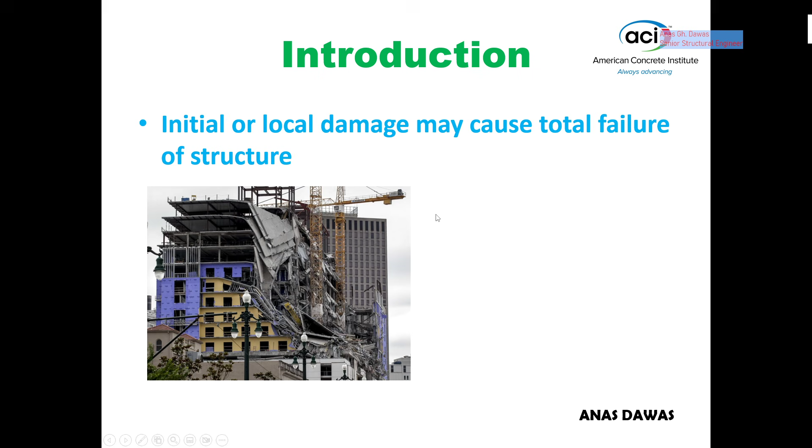First of all, there are many buildings that collapsed totally because of local failure. ACI code is trying to avoid the progressive collapse due to local failure. So if one member fails in your structure, or if one or two members fail in your structure, it shouldn't collapse totally. Initial or local damage in some buildings may cause a total failure of structure. This behavior is prohibited by the code.

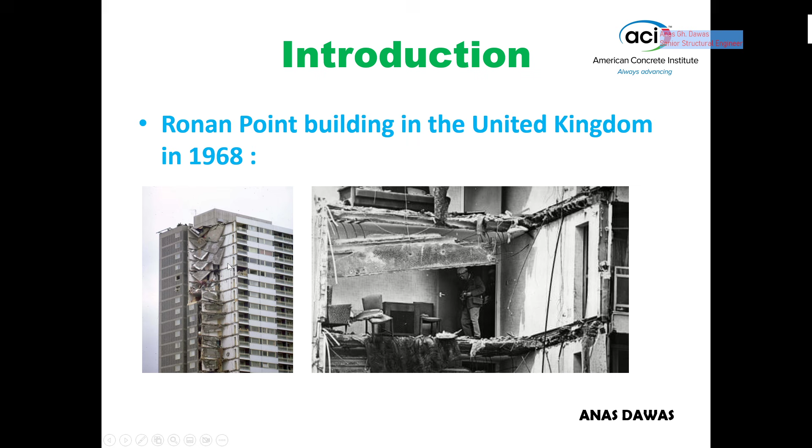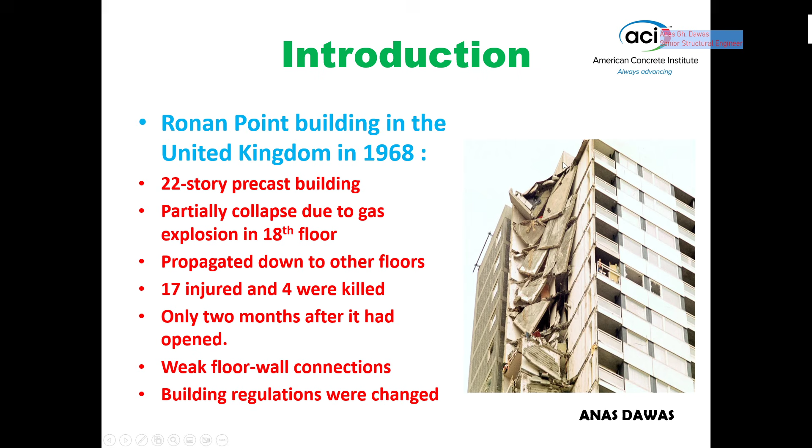This building, Ronan Point building in the United Kingdom, 1968, as you can see here, we can see a progressive collapse due only to a local failure. This building is a 22-story precast building, partially collapsed due to a gas explosion on the 18th floor. This failure or local failure propagated down to other floors. 17 injured and 4 were killed only 2 months after it had opened. The main reason was weak floor-wall connections. Building regulations were changed. So here we have one problem, one local failure caused this type of progressive collapse.

Also in Oklahoma City, 1995, explosion of a truck bomb. As you can see, this explosion destroyed an exterior column supporting a transfer girder, causing collapse of nearly half the RC frame building. 168 deaths. This is a very big disaster.

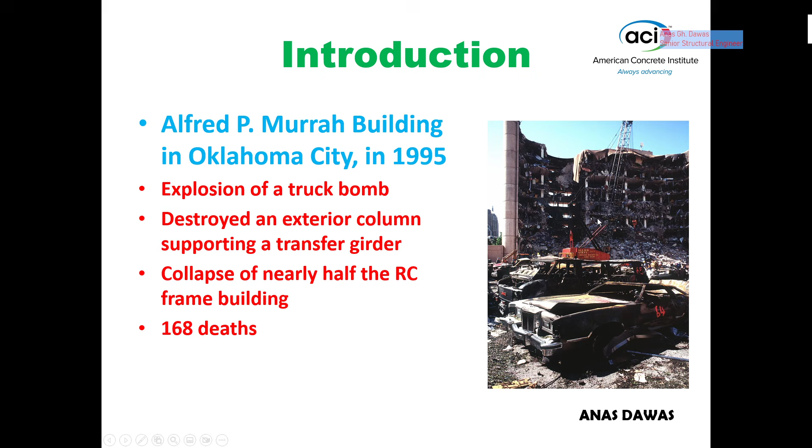Also in Boston, 1971, we have a 16 floor concrete building, punching failure at roof level. Here we have a local failure. Collapse after placing block in all floors, propagated all the way to the ground floor. This collapse caused a damage of 2/3 of the building. For this type of failure we have 4 deaths, and this type of failure is caused by unbalanced moments transferred between the column and the flat plate.

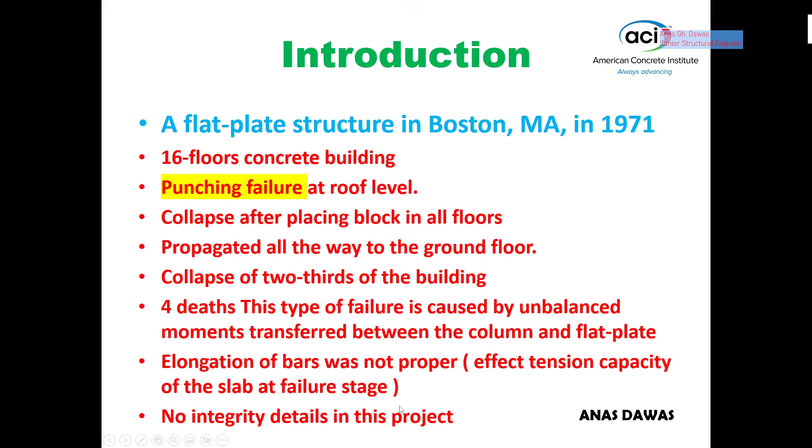Elongation of bars was not proper, affecting the tension capacity of the slab at failure stage. Also, there were no integrity details in this project. As you can see, this portion of the building collapsed totally.

Current integrity provisions are intended to aid in redistributing gravity load after an initial failure. Assume that you have a multi-story building, and in this building, one of the column-slab connections failed due to shear. If you don't provide integrity requirements for this building, the loads of this column will be redistributed to other nearby columns. If the DC ratio to shear is at its design limit, and you don't have margin for the redistribution of such amount of forces, progressive collapse can occur.

In Dubai, for any building with height more than 300 meters, you have to provide a progressive collapse study. This is different than the ACI intent, but ACI is trying to provide integrity provisions. These integrity provisions will not prevent the progressive collapse, but will improve the behavior of the structure, will tie the structure all together to reduce the effect of local failures, and to try to limit the spreading of local failures and to avoid the progressive collapse. But again, satisfying these requirements will not guarantee preventing the progressive collapse, but in general the behavior will be much better.

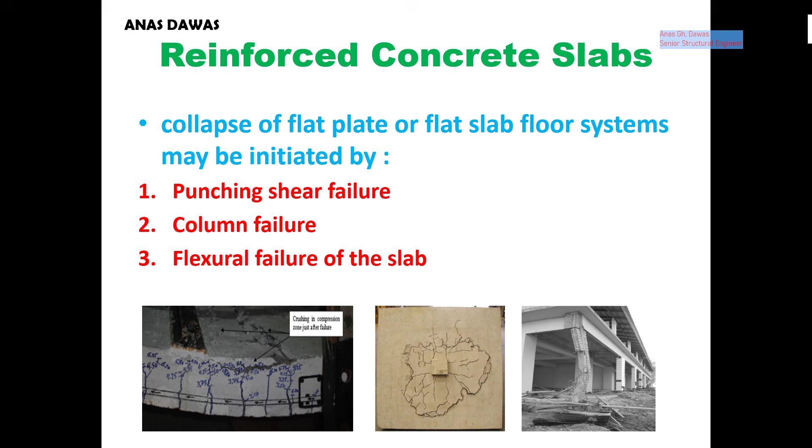Again, here we are interested in gravity loads. I have not seen integrity requirements for seismic forces, but I believe that integrity requirements are very important for all types of loads. But most of the provisions in the code are related to gravity loads. Collapse of flat plate or flat slab floor systems may be initiated by punching shear failure, column failure, or flexural failure of the slab. This local failure can be extended to a progressive collapse.

We have here $216 million in losses. This amount of money is equivalent to 420 million at 2022 value.

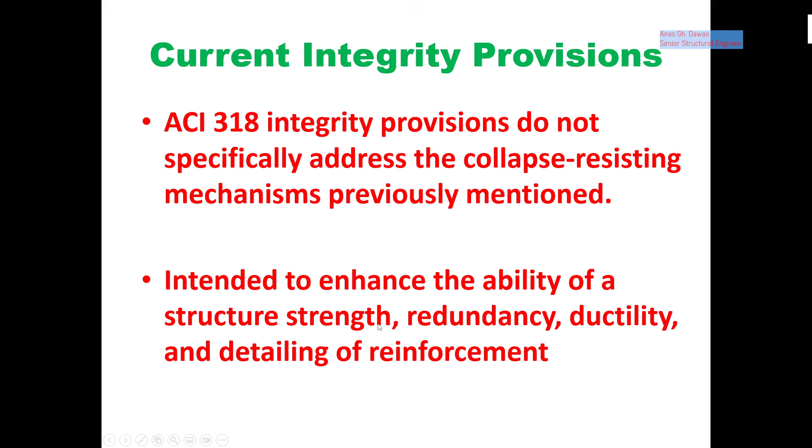ACI 318 integrity provisions do not specifically address the collapse-resisting mechanisms previously mentioned, intended to enhance structure strength, redundancy, ductility, and detailing of reinforcement. Again, it's very important to keep some bottom bars continuous through the column-slab connection to keep post-punching capacity after a failure. This will help avoid transferring the full loads to other nearby connections, and prevent the structure from full collapse.

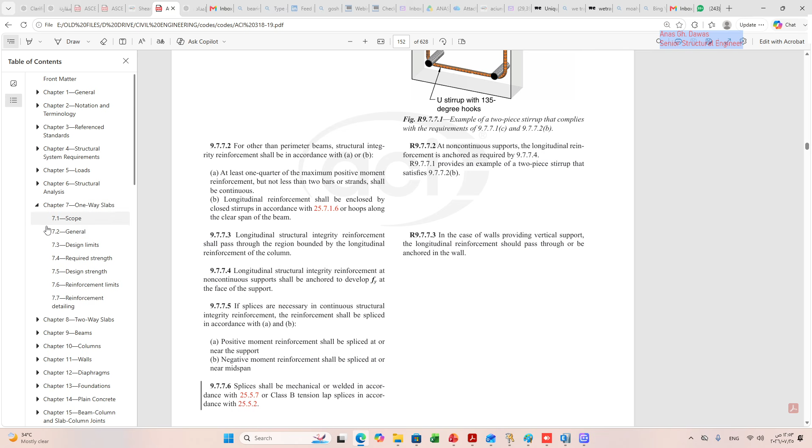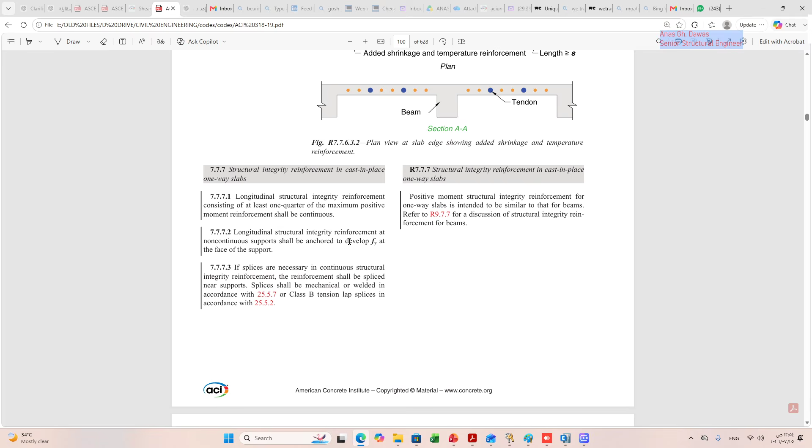For one-way slabs, here we have 7.7 detailing requirements. If you look here, we find something called integrity requirements - structural integrity requirements in cast-in-place one-way slabs. Since this section is included in the main chapter of one-way slab, satisfying these provisions is mandatory.

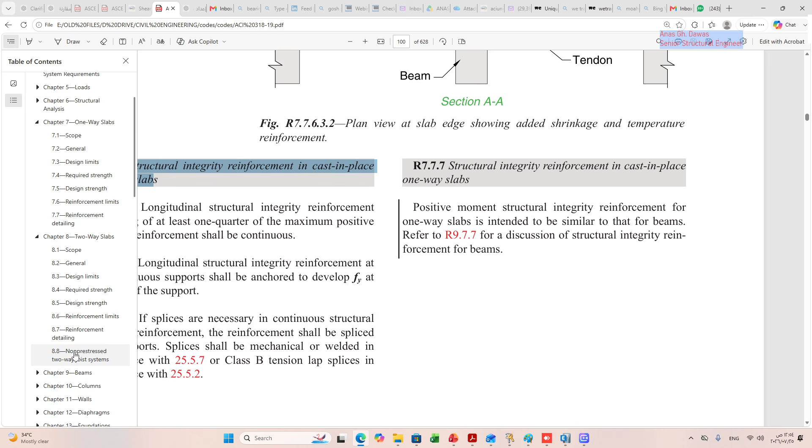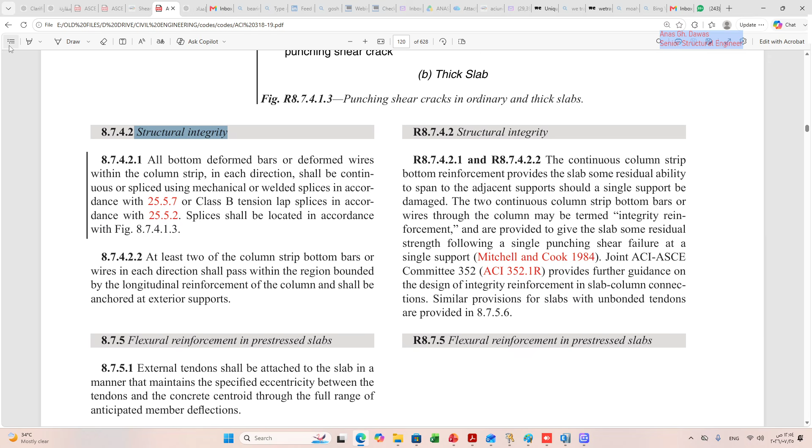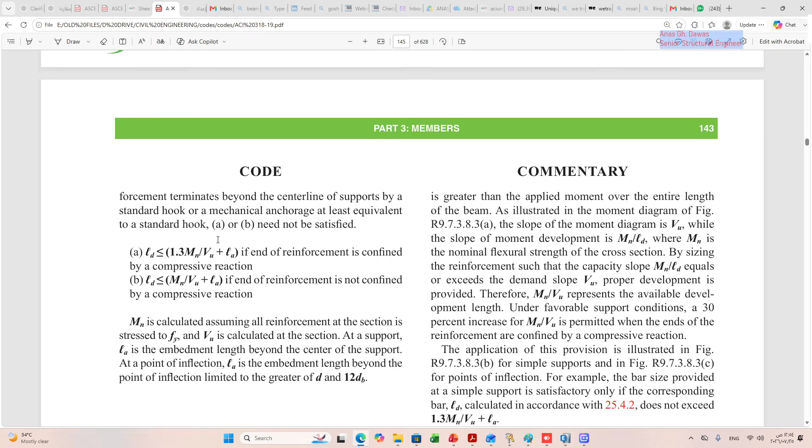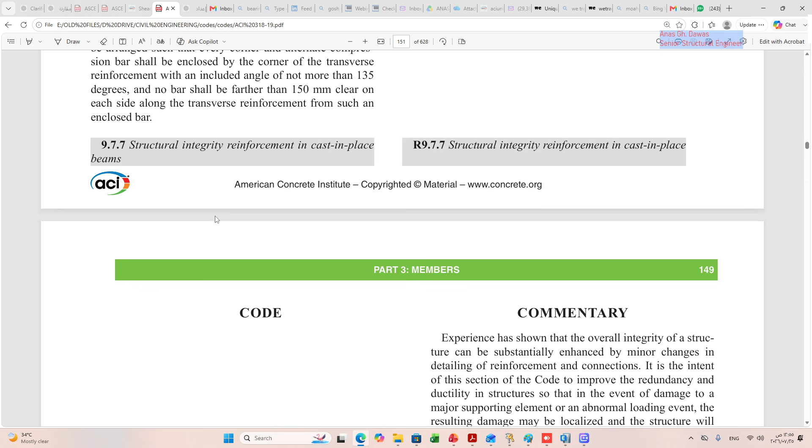Also, if you go to two-way slabs, 8.7 for their detailing, we also find integrity requirements - structural integrity. Also, if you go to the beams chapter, 9.7 for the detailing, we also have integrity requirements somewhere here - structural integrity reinforcement in cast-in-place beams. So they are mandatory. You must satisfy these requirements.

Let's start with one-way slabs. Provision 7.7.7, I think this is commentary: positive moment structural integrity reinforcement for one-way slabs is intended to be similar to that for beams. Provision 7.7.7.1: longitudinal structural integrity reinforcement consisting of at least 1/4 of the maximum positive moment reinforcement shall be continuous. All information here is copyright of ACI, the American Concrete Institute. Anyway, if you look here, 1/4 of the total maximum positive moment reinforcement must be continuous. This is very important.

Longitudinal structural integrity reinforcement at non-continuous supports shall be anchored to develop yield at the face of the support. If you look here, you see some bars extended into the support. As per 7.7.7.2, these bars must be anchored inside the supporting member.

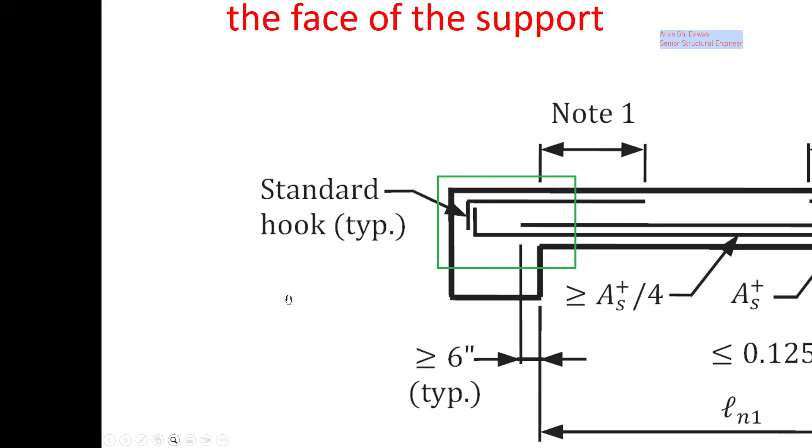Some engineers always think that the development length or standard hook shall be satisfied only for the top reinforcement. But as per the ACI code, especially for the integrity reinforcement portion - not for all bars - the bottom integrity bars also must satisfy the anchorage requirements at the support. This is very important.

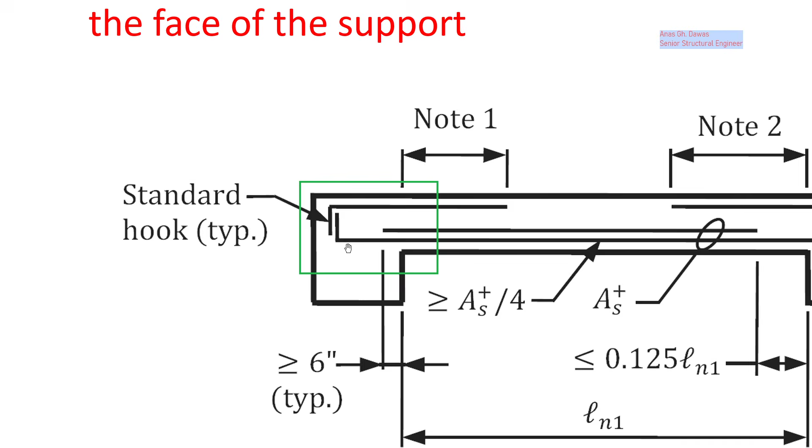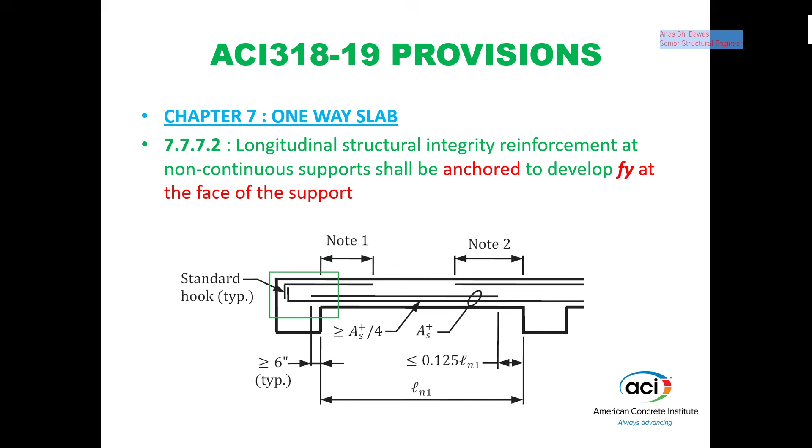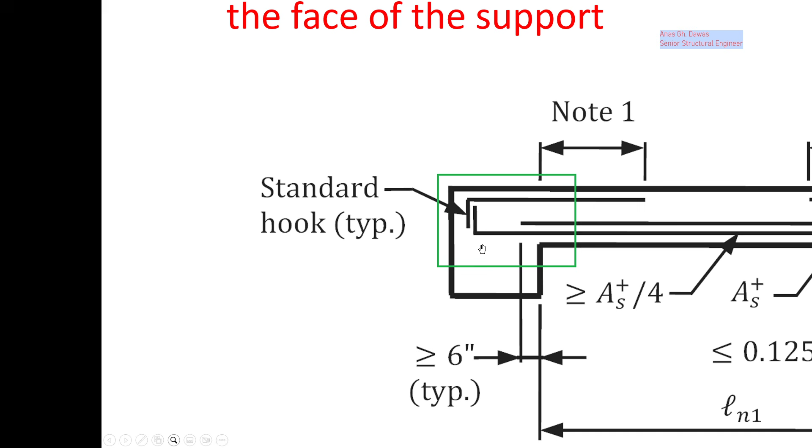By the way, this is for one-way slab. Again, here the development or anchorage requirement cannot be reduced by excess reinforcement or by the reduction of development length for excess reinforcement. Some engineers think that if they are not able to satisfy the anchorage requirements at the support, they can increase more bars to reduce the stress so the development length can be shorter. No, this is not permitted for the integrity reinforcement.

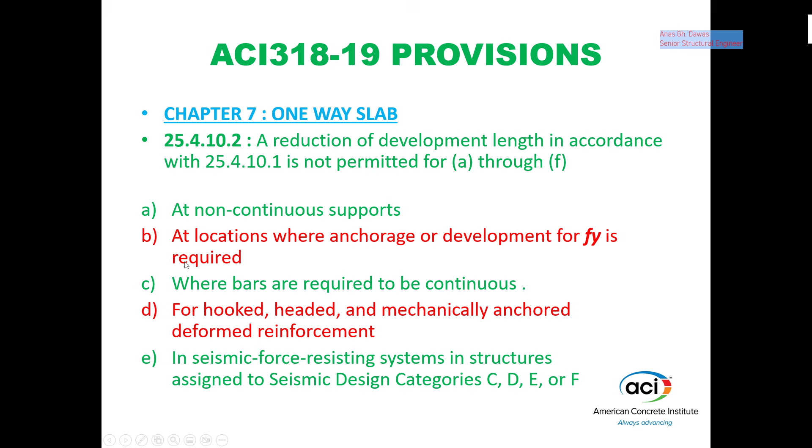We have here around 5 cases where a reduction of development length by using excess reinforcement is not permitted. You have to know that increasing the reinforcement more than required will not allow you to reduce the required development length. One of these cases is at locations where anchorage or development for fy is required, so the integrity reinforcement is covered by this case.

Okay, another provision for one-way slab integrity reinforcement: if splices are necessary in continuous structural integrity reinforcement, the reinforcement shall be spliced near supports. If you cannot keep the bar continuous, you can use a splice, but two conditions must be met: the splice must be near the support, and class B tension lap splices must be used. Maybe you will think that at this location we are far away from the positive moment, so we can use tension splice class A, but for the integrity reinforcement, you must use class B. You will ask me why?

Because the bottom reinforcement is very important to prevent progressive collapse by something called catenary action. By the catenary action, when excessive deformation occurs to the slab, the bottom reinforcement will prevent the total loss of the connections and the total loss of capacity. That's why the code is trying to keep those bars continuous with a class B tension splice.

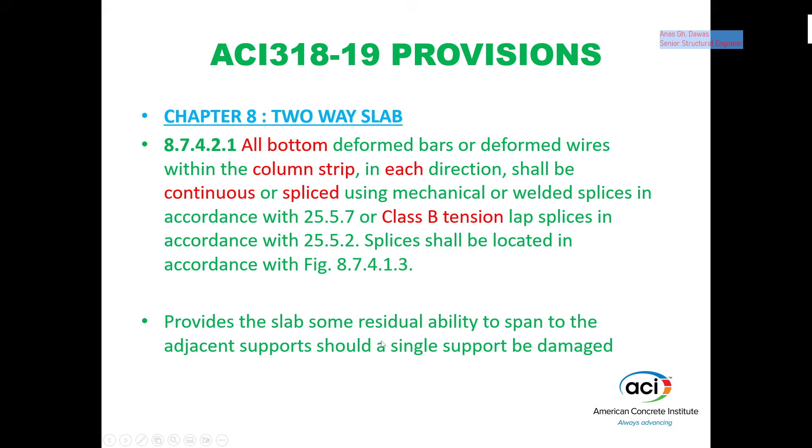By the way, this is not normal or typical in practice. In practice, they are using conventional lap splice, which provides the slab some residual ability to span to the adjacent supports should a single support be damaged.

As you can see here, what does the code need for two-way slabs to satisfy the integrity requirement? First of all, the bars within the column strip width must be continuous, or class B lap splices in tension must be satisfied. Number two, minimum two bars must pass through the core of the columns and must be bounded by the longitudinal bars of the columns. These bars will prevent the total collapse of the slab, will tie the slab, and will prevent the total loss of the connections, and will provide post-punching capacity.

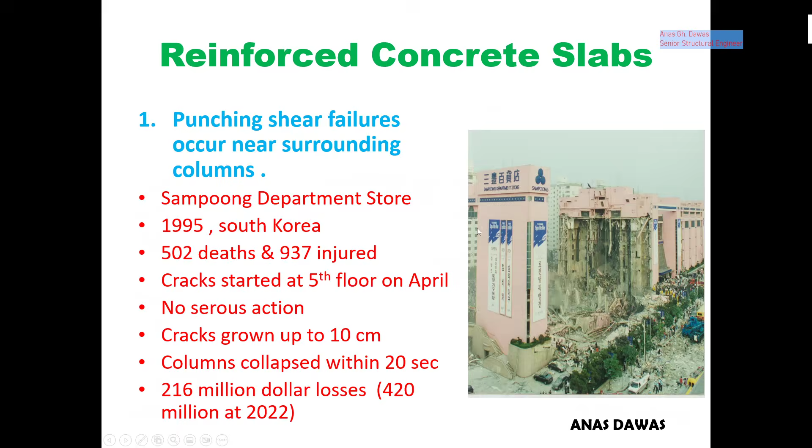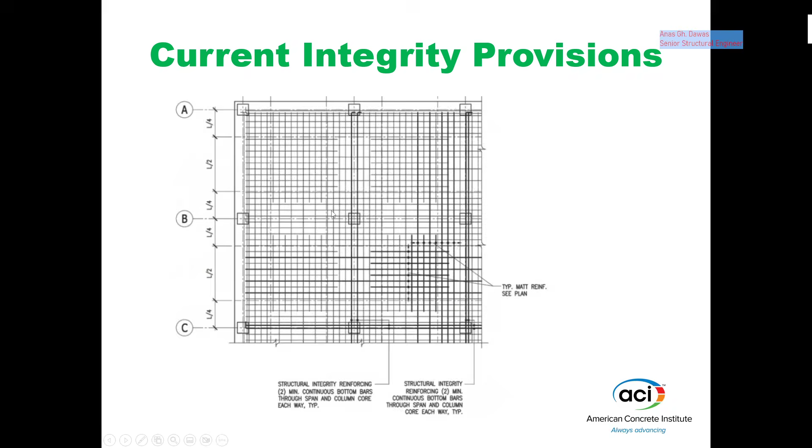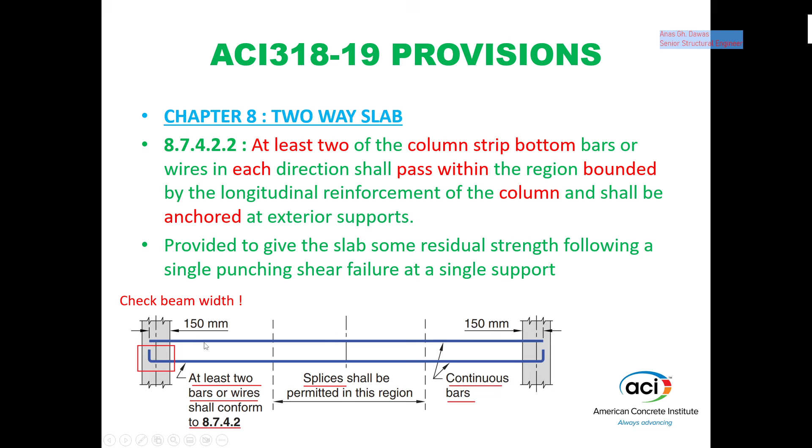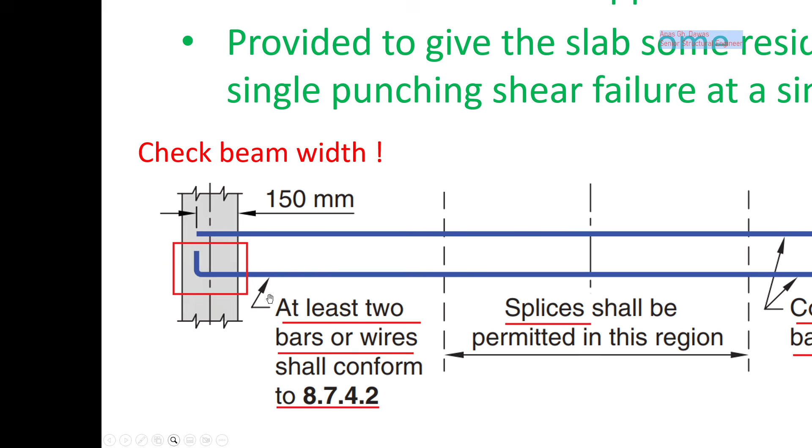That's why the code states here, at least two of the column strip bottom bars or wires in each direction shall pass within the region bounded by the longitudinal reinforcement of the column, and shall be anchored at the exterior support. Again, we have to satisfy the anchorage, not only for the top but also for the bottom reinforcement. By the way, this is not required for all bars, only for the integrity reinforcement.

Okay, now for beams in chapter 9, we have additional requirements. For beams along the perimeter, here we are talking about the perimeter beams, you have to know that we have different integrity requirements for perimeter beams and for interior beams. For beams along the perimeter of the structure, structural integrity reinforcement shall be in accordance with A through C, so you have to satisfy all of them.

A, at least 1/4 of the maximum positive moment reinforcement, but not less than 2 bars or strands, shall be continuous. At least 1/6 of the negative moment reinforcement at the support, but not less than 2 bars or strands, shall be continuous.

Longitudinal structural integrity reinforcement shall be enclosed by closed stirrups, so here we don't have torsion. I will say that typically we use closed stirrups for resisting torsion. Assume that you have perimeter beams but without torsion, even though without torsion, you have to use closed stirrups. Why? Because if we have a loss of one support, perimeter beams will be subjected to high torsion. That's why we have to provide closed stirrups in accordance with 25.7.1.6, or hoops, along the clear span of the beam.

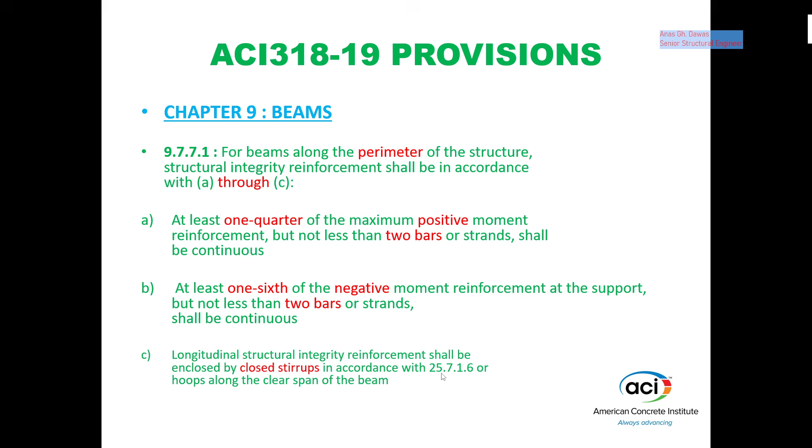As you can see here, you have first of all to provide continuous bottom bars. 1/4 of the maximum positive reinforcement must be continuous, and if you cannot provide one continuous bar, you have to use lap splices near the support, by the way, class B tension splices, and the bottom bars must be anchored in the support. In addition, you have to keep 1/6 of the negative reinforcement with minimum 2 bars continuous. Again, you have to provide closed stirrups or hoops along the span of the beam.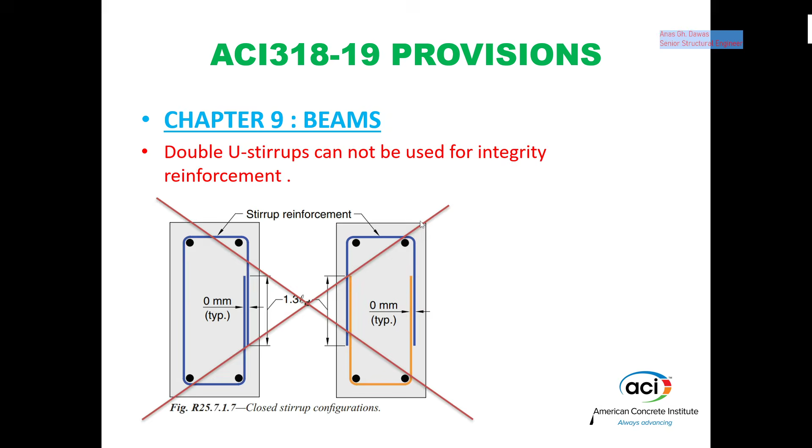Here we have discussed the perimeter beams, but for interior beams, other than perimeter beams, structural integrity reinforcement shall be in accordance with A or B. If you remember, for perimeter beams we have three requirements that must be satisfied together. But here we have A or B.

Option A: at least 1/4 of the maximum positive moment reinforcement, but not less than 2 bars or strands, shall be continuous, same as before, with continuous bars using tension lap splices class B. Again, this requirement is only for the bottom reinforcement, not the same as the perimeter beams. Now we have discussed the bottom and the top reinforcement.

Anyway, we also have to satisfy the anchorage. This is option 1. Option 2, as you can see, we have 1/4. In option 2, there is no limit for the number of bars that must be continuous, but you must use enclosed closed stirrups.

So here, as you can see, there are no requirements for the number of bars that must be continuous, but the code needs you to use closed stirrups. This is required for the interior beams. Some engineers, or the majority, think that we don't need closed stirrups for interior beams because they are not subjected to torsion.

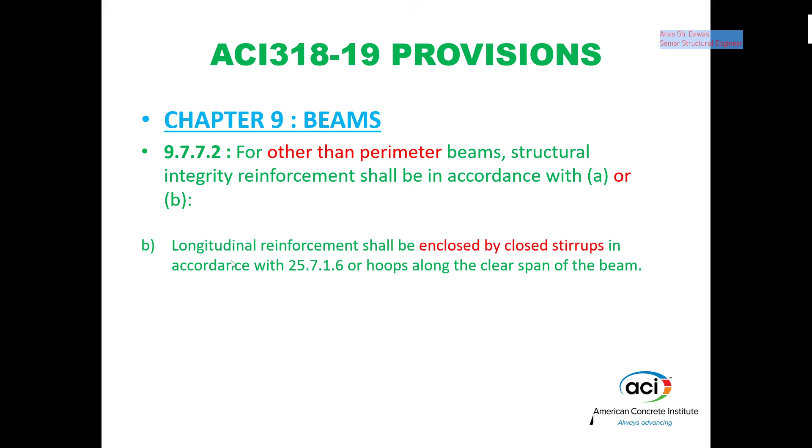Here also we have 9.7.7.4: longitudinal structural integrity reinforcement at non-continuous supports shall be anchored to develop yield strength at the face. By the way, this is required when you would like to use option 1 for the beam, because here we have integrity reinforcement by the minimum 1/4. But in option B, we don't have a minimum number of reinforcement.

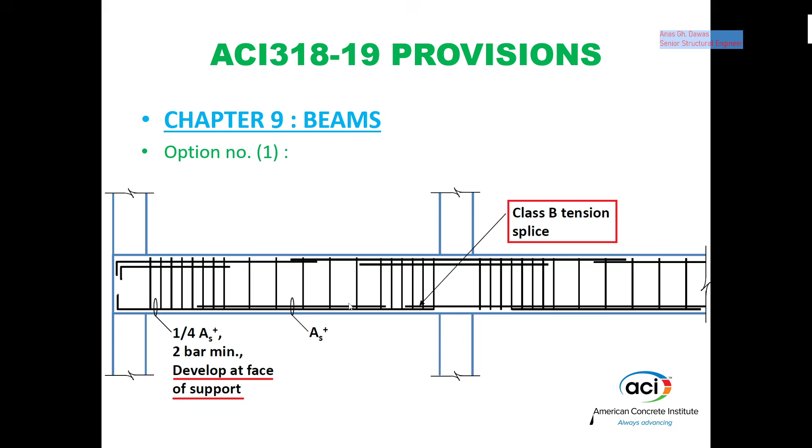That's why ACI, when they discuss this section, clearly say that in this option, no need to satisfy the anchorage here. By the way, I was confused when looking at provision 9.7.7.4, because the code clearly mentions that the longitudinal structural integrity reinforcement at non-continuous supports shall be anchored to develop yield strength. So you feel that you always have to satisfy this anchorage, but again, this clarification was provided by ACI University in one of the webinars I attended before.

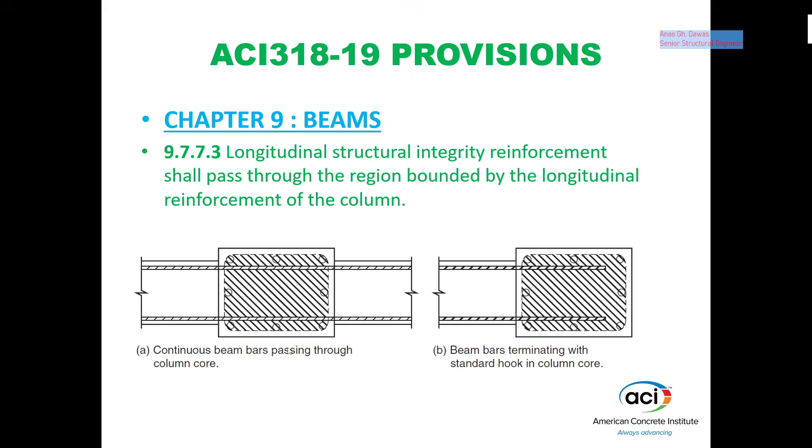Okay, for joist slab, in chapter 9, joist slab or ribbed slab, we also have integrity requirements. For structural integrity, at least one bottom bar in each joist shall be continuous and shall be anchored to develop yield strength at the face of support. So one bottom bar must be continuous.

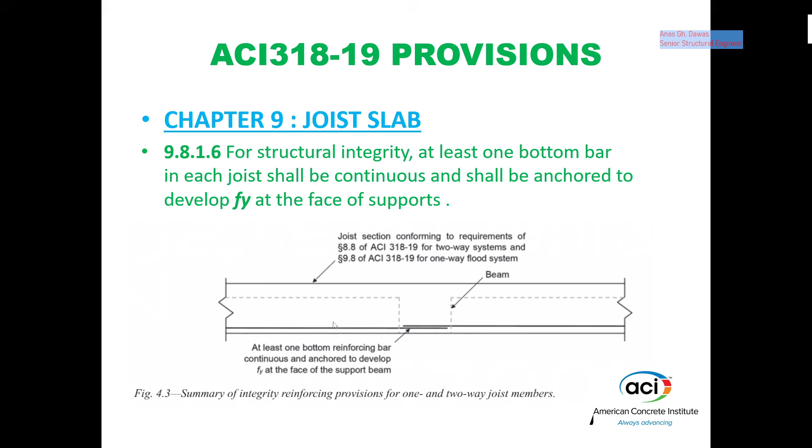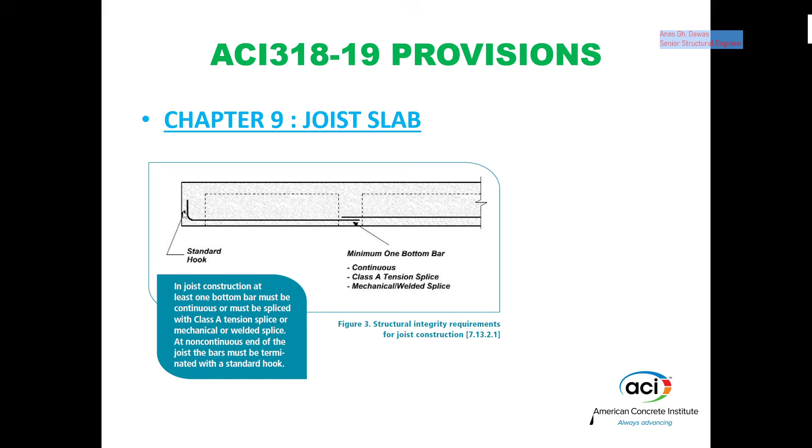We have discussed this before for two-way slabs: we have to provide bottom bars continuous through the column, and these bars must also be anchored at the edge support, and the bars of the column strip must be continuous, or class B tension splices must be used.

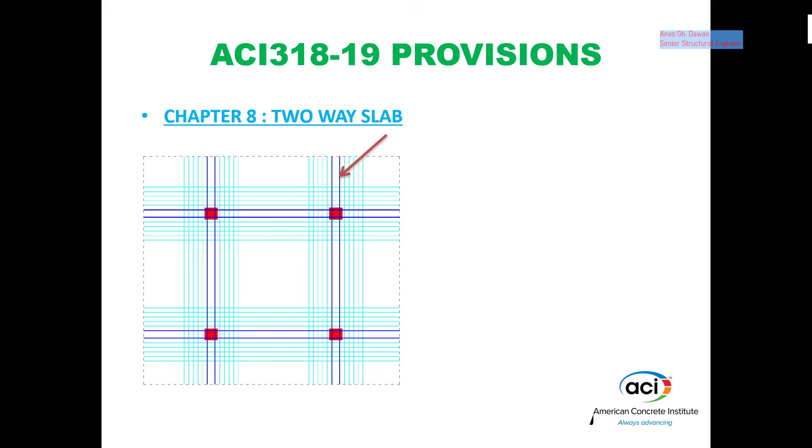I think I have finished the major integrity requirements in ACI 318-19.